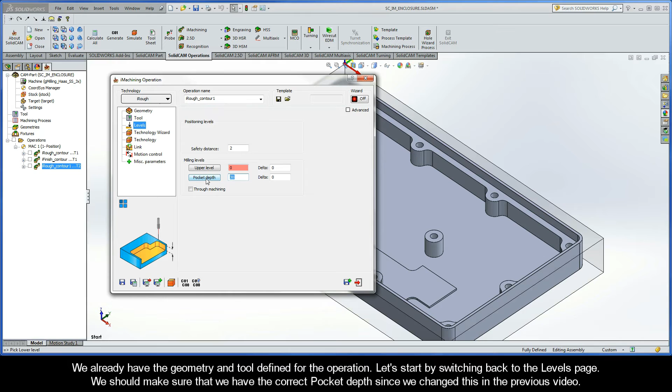We already have the geometry and the tool defined for the operation, so let's start by switching back to the Levels page. We should make sure that we have the correct pocket depth since we changed this in the previous video. Click the Pocket Depth button and pick on the lower face of the pocket to define the correct machining depth. Click OK to accept the selection.

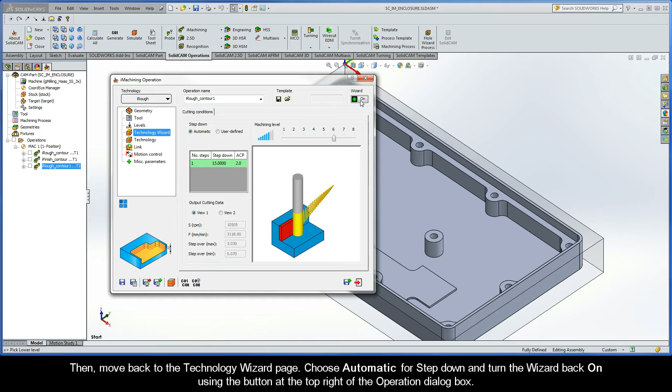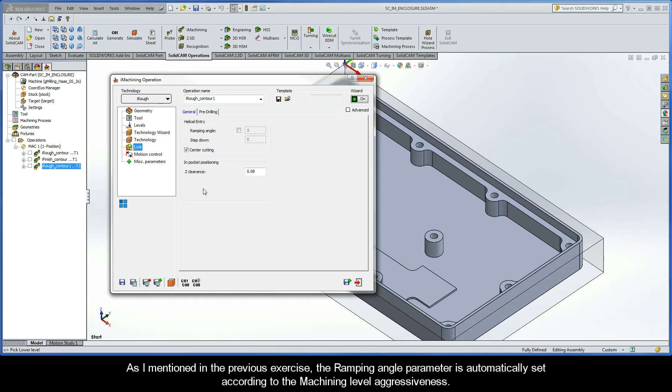Then move back to the Technology Wizard page. Choose Automatic for Step Down and turn the wizard back on using the button at the top right of the Operation dialog box. On the Technology page, take note that the default wall island offset is the usual 0.24 millimeters. On the Link page, we'll see that the helical entry into the pocket will be performed at a ramping angle of 5 degrees. As I mentioned in the previous exercise, the ramping angle parameter is automatically set according to the machining level aggressiveness. Let's now calculate and simulate the results.

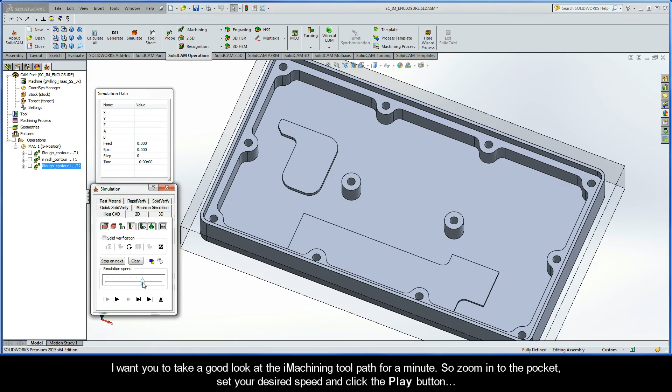Go ahead and click Save and Calculate, and then click Simulate to open up the simulation control panel. Now I want you to take a good look at the iMachining toolpath for just a minute. So zoom into the pocket, set your desired speed, and then click the Play button.

You'll see that the pocket is split into two areas, both containing a helical entry, followed by the pocket roughing toolpath. Due to its size, you could see that the tool was unable to fit through these narrow spaces.

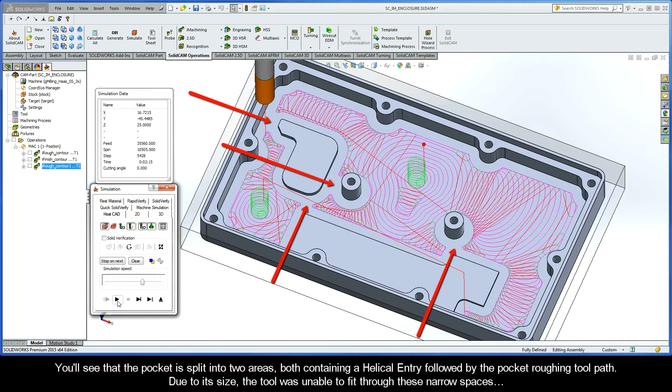What should we do now? Well, we cannot go straight to finishing. We first have to clear out this remaining material. Let's see what iMachining can do for us when we use the iRest technology type prior to using iFinish.

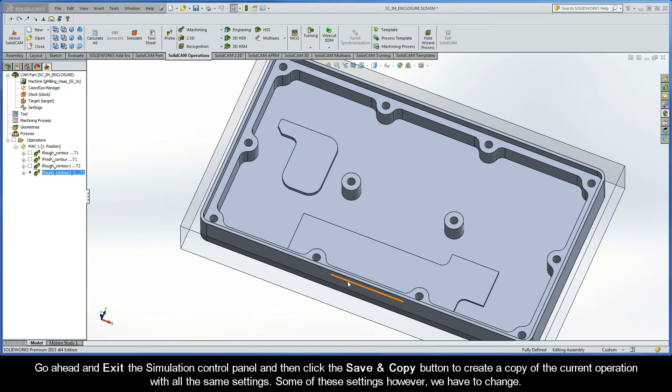Go ahead and exit the simulation control panel and then click the Save and Copy button to create a copy of the current operation with all the same settings. Some of these settings, however, we of course have to change.

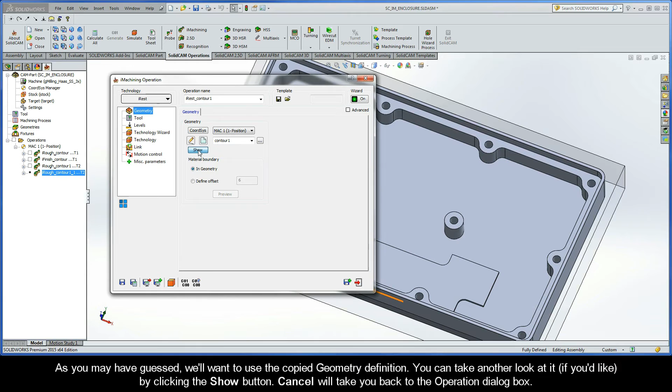First of all, click the Technology drop-down in the upper left corner and choose iRest from the list. As you may have guessed, we'll of course want to use the copied geometry definition. You can take another look at it if you'd like by clicking the Show button. Cancel will take you back to the Operation dialog box.

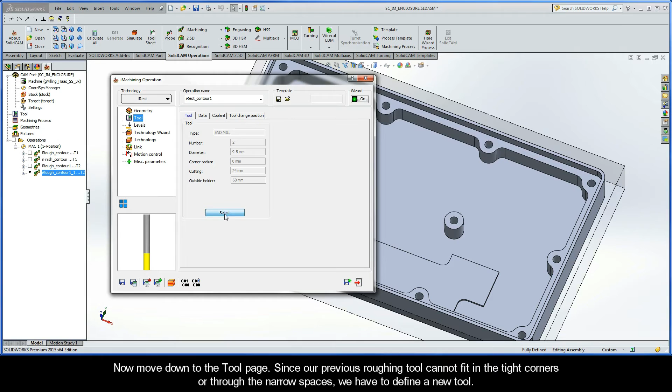Now move down to the Tool page. Since our previous roughing tool cannot fit in the tight corners or through the narrow spaces, we obviously have to define a new tool. Click Select and then the Add Milling Tool button to start the tool definition. Select End Mill from the Milling Tools list.

Leave just about all the given parameters, but change the number of flutes to 4. This tool will be perfect for not only our rest machining, but also our finishing. Now click Select to choose the tool for the operation and exit the Part Tool table.

We can use the exact same milling levels definitions that were copied over from the iRough operation, and we can even use the default cutting conditions that were generated by the wizard based on a machining level of 6. Let's now spend a minute or two on the Technology page.

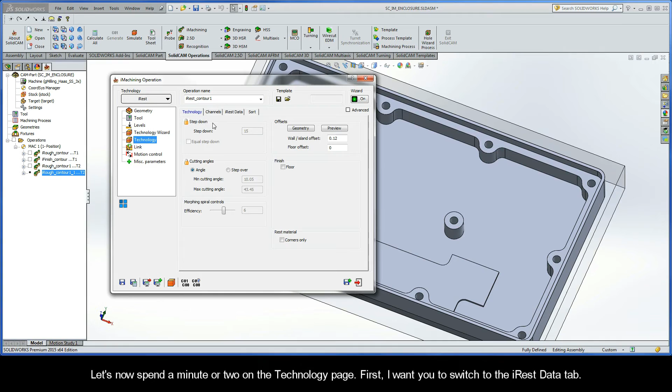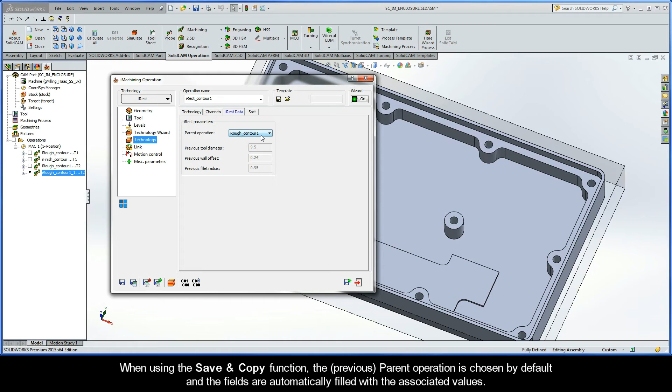First, I want you to switch to the iRest Data tab. As I mentioned in the previous exercise, there are 3 important values needed for calculating rest material. They are previous tool diameter, previous wall offset, and previous fillet radius. When using the Save and Copy function, the previous parent operation is chosen by default and the fields are automatically filled with the associated values.

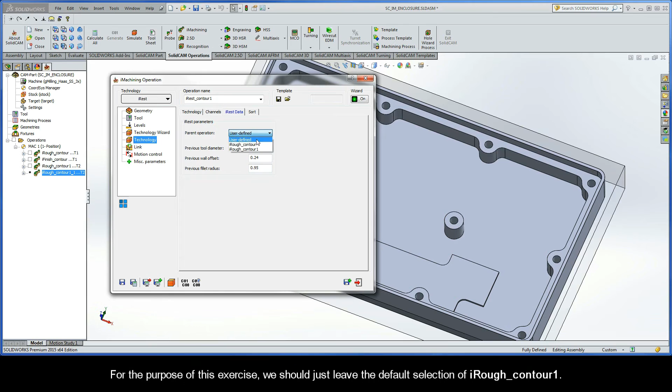In the instance the previous operation is not an iMachining operation, these values may also be entered manually by choosing User-Defined from the drop-down list. You'll notice the fields are now open to be edited. For the purpose of this exercise, we should just leave the default selection of iRough Contour 1.

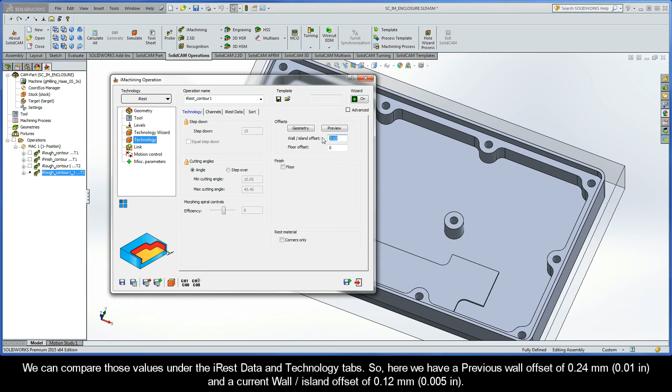Now, it's important for you to know that the wall island offset for rest material must be greater than 0, but less than the previous wall offset. We can compare those values under the iRest Data and Technology tabs. So here we have a previous wall offset of 0.24 millimeters and a current wall island offset of 0.12 millimeters.

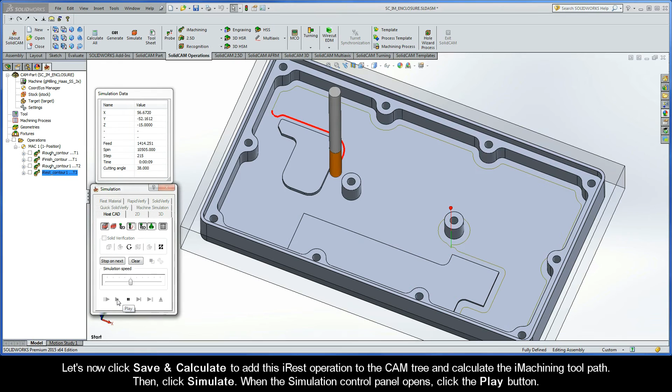Let's now click Save and Calculate to add this iRest operation to the CAM tree and calculate the iMachining toolpath. Then click Simulate. When the simulation control panel opens, click the Play button. The tool performs the rest machining and works around the walls, islands, in the corners, and through the narrow spaces.

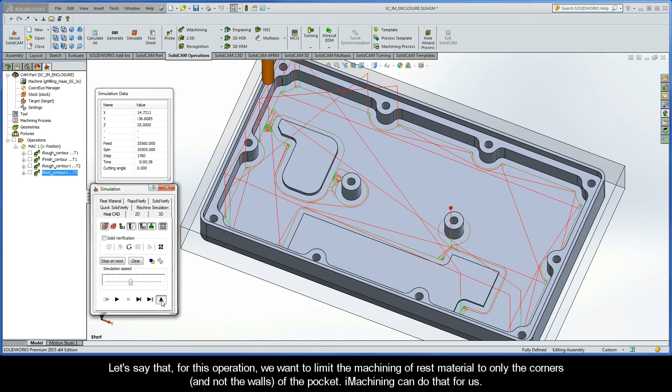Let's say that for this operation, we want to limit the machining of rest material to only the corners and not the walls of the pocket. Well, iMachining can do that for us. Go ahead and exit the simulation control panel, which will take us back to the technology page. In the rest material area, select the corners only checkbox. Using this option could help us save on cycle time for this operation.

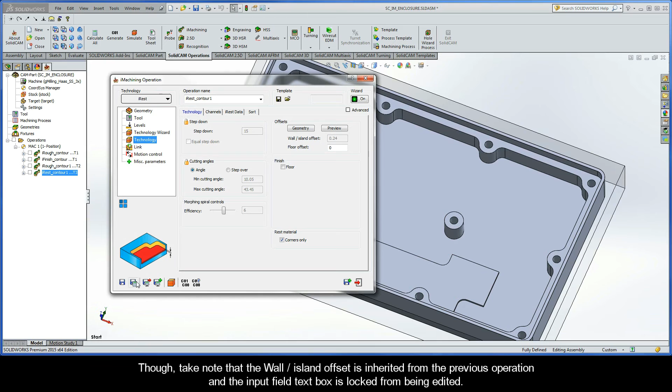Though, take note that the wall island offset is inherited from the previous operation and the input field text box is locked from being edited. Let's calculate and simulate the new results. Click Save and Calculate, and then click Simulate. When the simulation control panel appears, click the Play button.

This time, we can see the tool working in not just the corners, but the narrow areas as well. You can see here that we even reduced the cycle time by almost half.

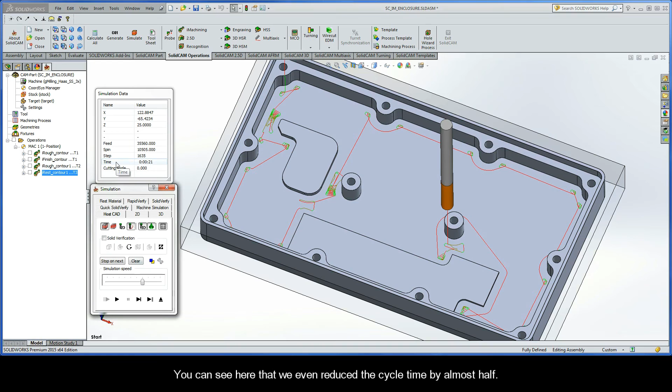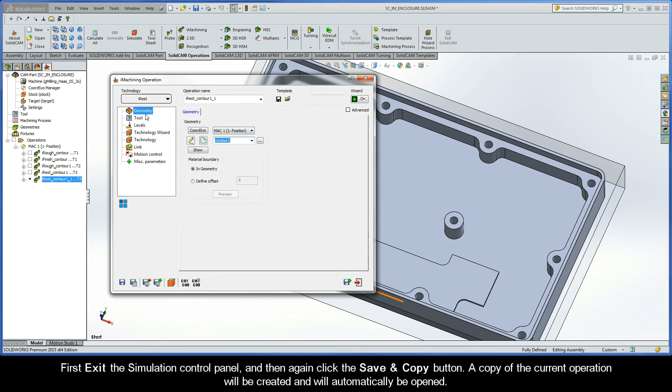Now, we can perform the finishing of the walls and islands of the pocket using the iFinish technology type. First, exit the simulation control panel, and then again click the Save and Copy button. A copy of the current operation will be created and will be automatically opened. Change the technology type to iFinish. In this case, this is all we have to do. We will use the copy geometry, tool, and levels definitions from the previous iRest operation. We can also use the default cutting conditions generated by the wizard.

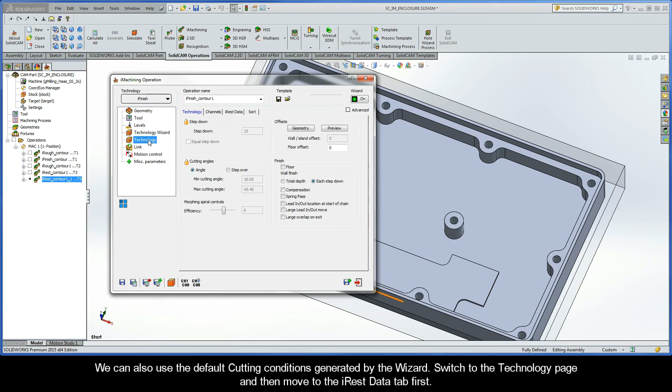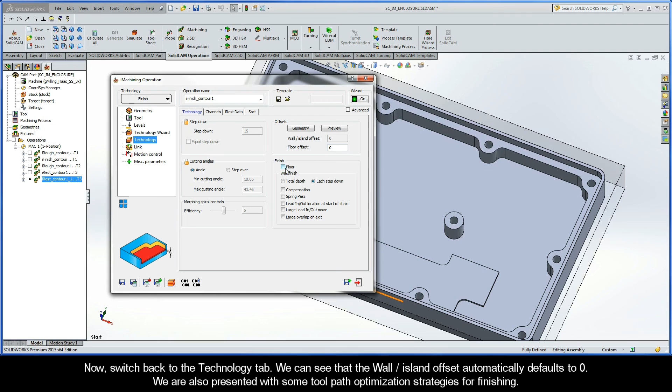Now, switch to the Technology page, and then move to the iRest Data tab first. You'll see that the previous iRest operation is selected as the parent operation by default, and the fields are automatically filled with the 3 important values needed for calculating the rest material. Now, switch back to the Technology tab. We can see that the wall island offset automatically defaults to 0. And we are also presented with some toolpath optimization strategies for finishing.

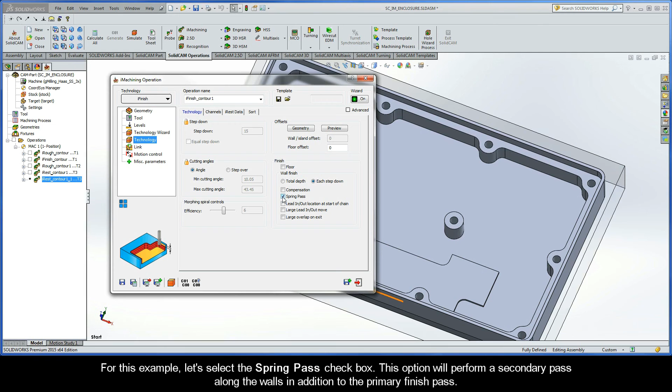We will only need to finish the walls and not the floor, so in this case, we can select either total depth or each step down in the wall finish area, since these depths are the same. For this example, let's select the Spring Pass checkbox. This option will perform a secondary pass along the walls in addition to the primary finish pass. This option aids in offsetting tool deflection to ensure that parts are finished more accurately and dimensionally correct. Now, since this operation will remove the original 0.24 millimeter allowance, it may be a good idea to use this option.

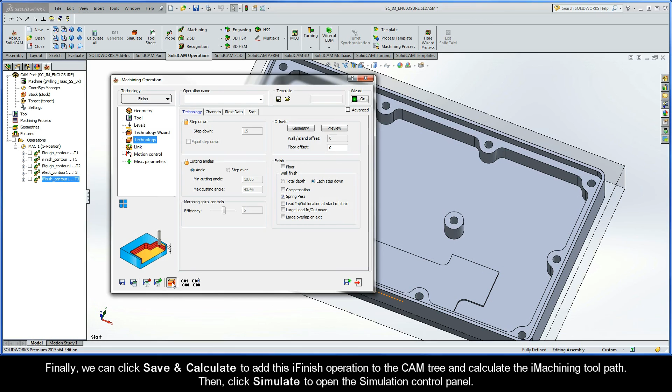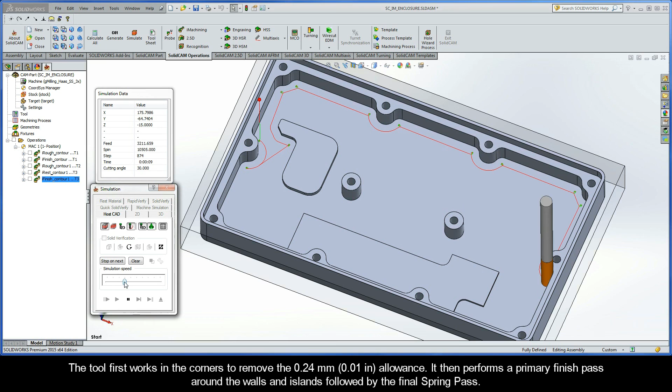Finally, we can click Save and Calculate to add this iFinish operation to the CAM tree and calculate the iMachining toolpath. Then, click Simulate to open the simulation control panel. We'll use the host CAD mode just like we've been doing all along. I would first slow the simulation speed down, and then click the Play button. The tool first works in the corners to remove the 0.24 millimeter allowance. It then performs a primary finish pass around the walls and islands, followed by the final spring pass. Let's now exit the simulation control panel.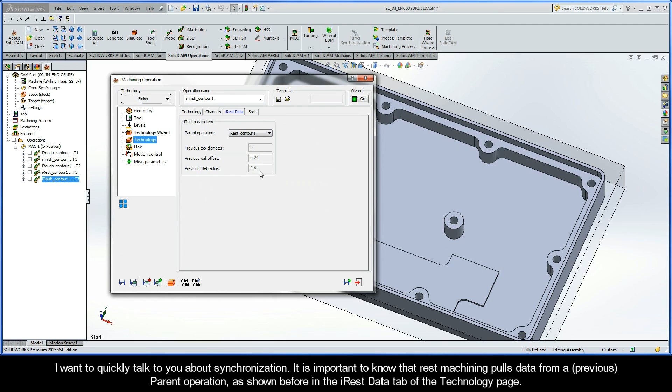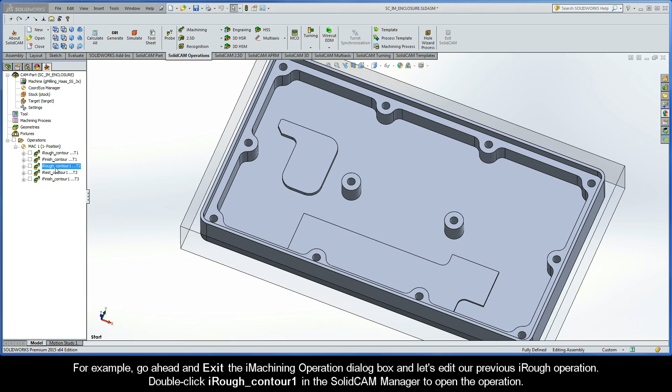Now, I want to quickly talk to you about synchronization. It is important to know that rest machining pulls data from a previous parent operation, as shown before in the iRest Data tab of the Technology page. If one of those three important values changes, the data will update, but the latter operations will need to be recalculated. So, for example, go ahead and exit the iMachining operation dialog box, and let's edit our previous iRough operation. Double-click iRough Contour 1 in the SolidCAM Manager to open the operation. Switch to the Technology page and change the wall island offset to 0.12 millimeters.

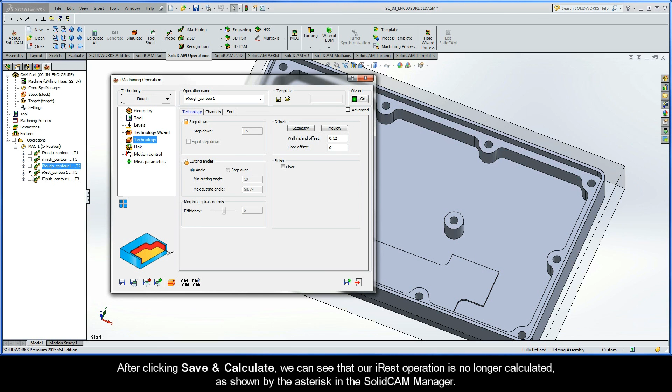After clicking Save and Calculate, we can see that our iRest operation is no longer calculated, as shown by the asterisk in the SolidCAM Manager. We'll need to first exit our current iRough operation. Then, double-click iRest Contour 1 in the SolidCAM Manager to open the operation. If you switch to the Technology page, you'll see that the wall island offset parameter and iRest data have been updated. We can click Save and Calculate to recalculate the operation.

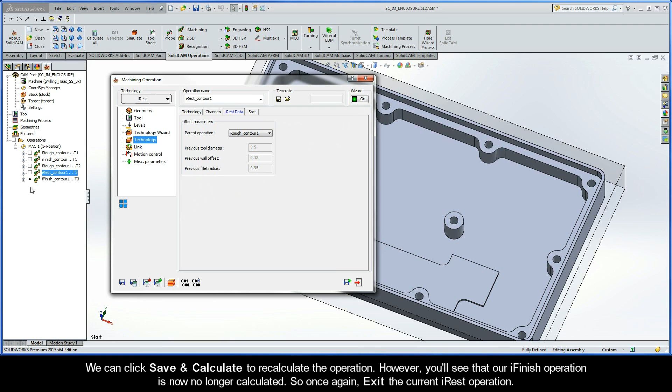However, you'll see that our iFinish operation is now no longer calculated. So once again, exit the current iRest operation. It just so happens that the iFinish operation we can recalculate from the CAM Manager. So to do that, right-click iFinish Contour 1 and choose the Calculate command to recalculate the operation with updated iRest data. And this is where I'll end Part 4.

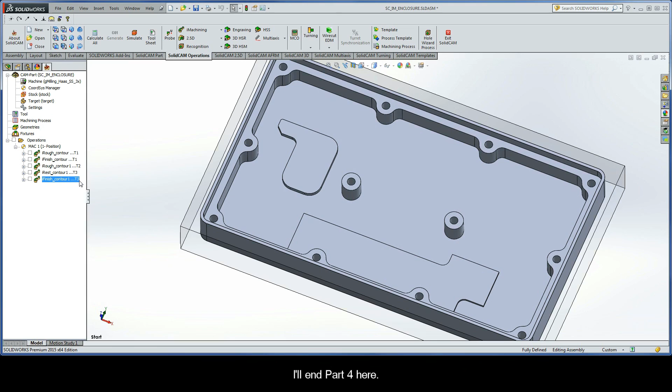So there you have it. We just defined the machining of the pocket using the iRough, iRest, and iFinish technology types in iMachining. Now, in instances where you have pockets with island configurations that are preventing your roughing tool from being able to fit in some areas, don't worry. You can easily use the iRest technology type prior to finishing. You can also quickly use the Save and Copy function like we did to simplify your selections and automatically define the iRest data from one operation to the next.

Now, join me for the last part in this series, where I'd like to talk to you about the tool definition and what parameters specifically affect iMachining and the wizard.